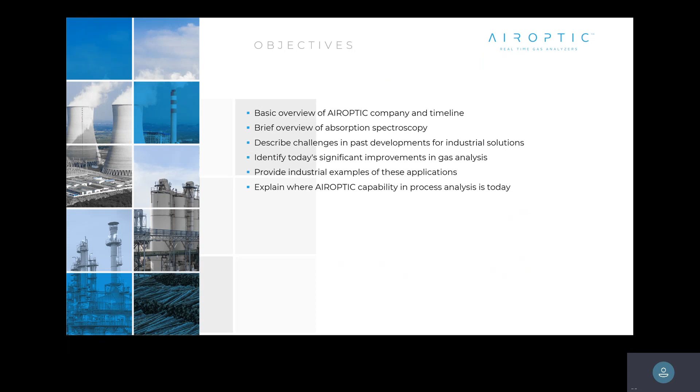So first, to give you a little background about Airoptic. Airoptic is a manufacturing facility, small medium enterprise company that's based in Poland, which was founded in 2010. They manufacture gas analytical equipment with an ISO 9001 certificate, and also have an in-house R&D department. Main applications are process control, power industry, pretty much all of the industries as a whole. With where we're at right now with near infrared and mid infrared, it's kind of difficult not to find a gas application that we can't do.

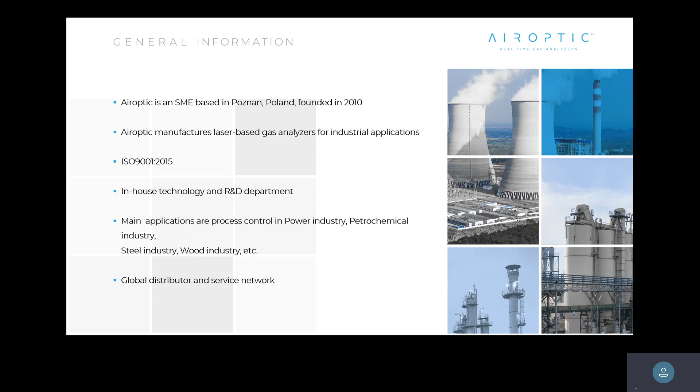And there also currently is a global distribution and service network set up around the world. So it's pretty important for us to understand a little bit about the history. I don't like to harp on it too much, but it's to kind of give you an understanding of where everything is coming from. So Dr.

Paweł Kluczyński initially was working for a company by the name of AltOptronic. This company was the first that came out with an ammonia in situ analyzer. He was also responsible for redesigning the algorithms and the optical bench for that analyzer, previous to Siemens acquiring that company in 1999. At that time, he was the chief physicist for about 10 years, and he was responsible for the LDS-6, which everyone is aware of now.

Going a little further, the SITRANS SL came out, which was their O2, SIL2 analyzer. Then in 2010, he created his own company, which was Airoptic. Now you'll see there's a little bit of a gap between 2010 and 2012, and the reason is that when he first created this company, he worked as a consultant, for companies that we know today like Emerson for their moisture applications, Mettler Toledo, and a few others. In 2015, we basically came out with the GasEye Cross Duct.

Significance of this analyzer is that we started getting into the mid-infrared for ICL lasers on single path analyzers. Then the multipass came out, which allows us to do multiple lasers into one. So we can do up to 6 lasers in one analyzer, giving us a lot of flexibility to meet customer needs.

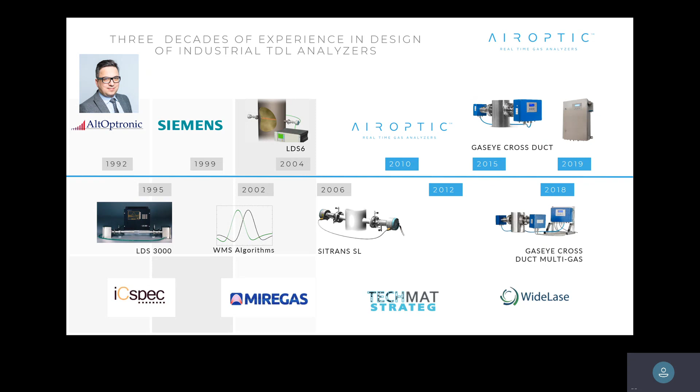What's even more significant is the WideLase project he sat on, working directly with the chip manufacturer and coming out with the first formaldehyde application. A lot of us have heard the papers today about open paths and formaldehyde. This was one of the applications he was directly responsible for.

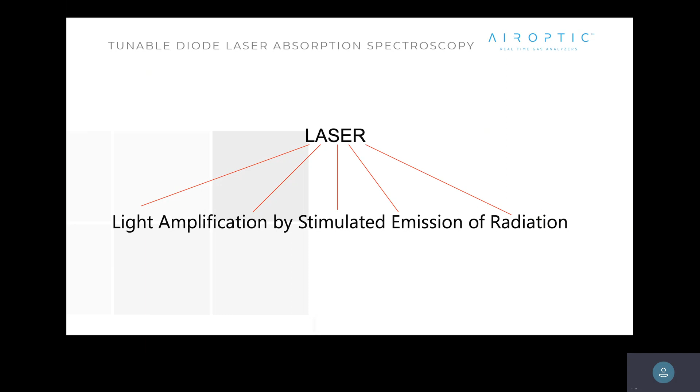So we use the acronym laser a lot. We really don't, you'd be surprised how many people don't know what the acronym stands for, right? It kind of speaks for itself: Light Amplification by Stimulated Emission of Radiation.

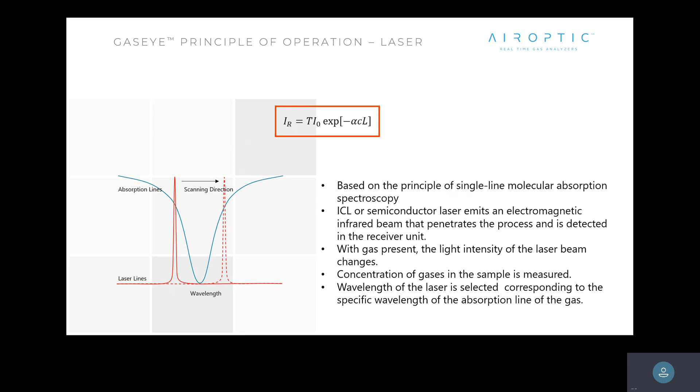Our technology works off of the Beer-Lambert law, absorption spectroscopy, where we're looking at the amount of electromagnetic radiation going through an open area. That open area will excite the molecule, which will absorb some of that energy. Then we look at the loss on the B side, at the very end. That loss of energy is proportional to the concentration between point A and point B.

So here we see our laser beam entering into the process, seeing the molecules or gas in the middle, and then we're also measuring the amount of loss on the end.

Every molecule has a certain amount of energy or atomic weight, based on the number of protons, neutrons, and electrons that we have. So what we're looking at is those vibrational bands that are absorbing in the near infrared and mid infrared region.

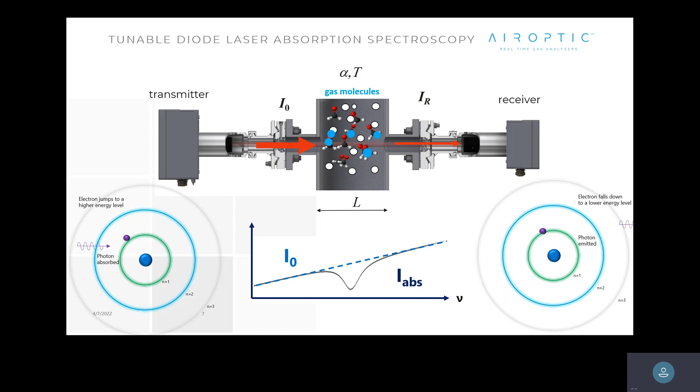As that electromagnetic radiation passes through the gas, you'll have some absorbance of that radiation, and you'll see the electron move from one shell to the next. So it's absorbing at that point. When it comes back down, it's moving to another transition. So that loss in radiation from point A to point B is what gives us the concentration in our analysis.

And then we're looking at the baseline, and again, that ratio of the baseline to the absorbance of the light is proportional to the concentration.

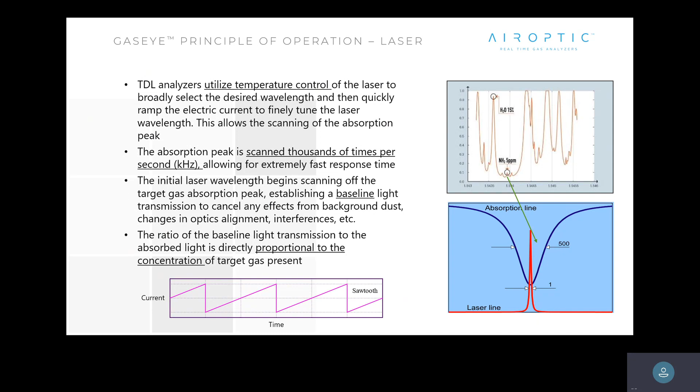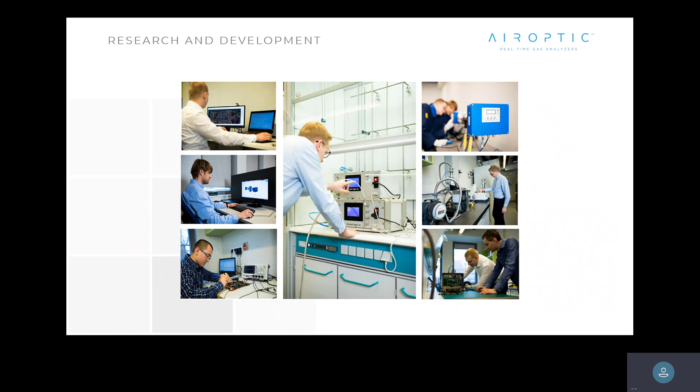This is a picture of their R&D, just to give you an idea of what it looks like back at the factory. A lot of scientists, a lot of R&D goes on to keep us up with being able to give a very highly accurate measurement, and helps with the development of what we need for the future.

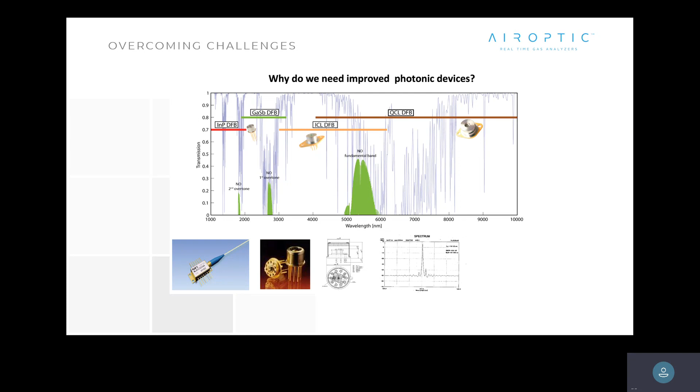So why is that significant? If we look at this chart here, we all know that in the past we've been pretty commonly in the near infrared region, and those were the spectrums we had available at the time. But now with the advancements with ICL and QCL, it gives us a pretty wide range of spectrum, a new spectrum that we can pick from to go into new applications.

If you see here, we're looking at anywhere between somewhere around 3,000 to 6,500, and we can see all of the different wavelengths that we're able to do within the mid-infrared. SO2, for instance, was something we never could do in the near infrared.

If we look at this next chart, we can see that in acetylene, in the near infrared, we had a very, very low absorbance. But now when we jump into the mid-infrared, we're talking about 30 times stronger worth of absorption spectra that we can pick from. So that gives us a better detection limit, better spectra, better absorption.

Same thing with NO and also with CO. You can see that line, the second line is our NO and our CO line. So we're basically just showing you what it looked like in the near infrared and now what we have available in the mid infrared.

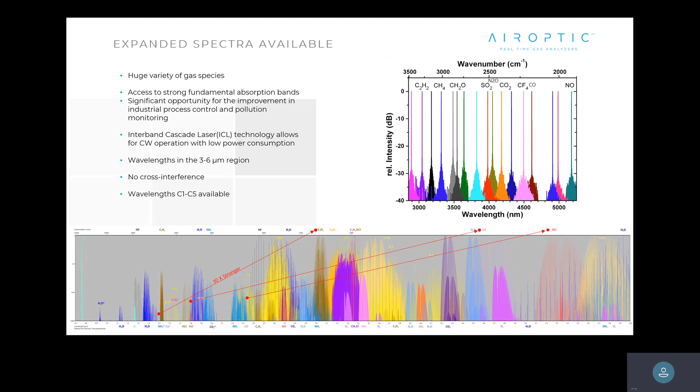So some of the advancements. So this is our GasEye, our cross duct analyzer. This is the analyzer that now has the ability to do near infrared and mid infrared within the same analyzer, with a lot of different gases here that we can pick from.

But for this analyzer, we have the capability of being able to incorporate up to 6 different lasers into one optical bench. So there's been a lot of advancements in our optomechanical bench. It allows us to make a lot of different measurements with a very low detection limit and also very, very low etalon noise issues.

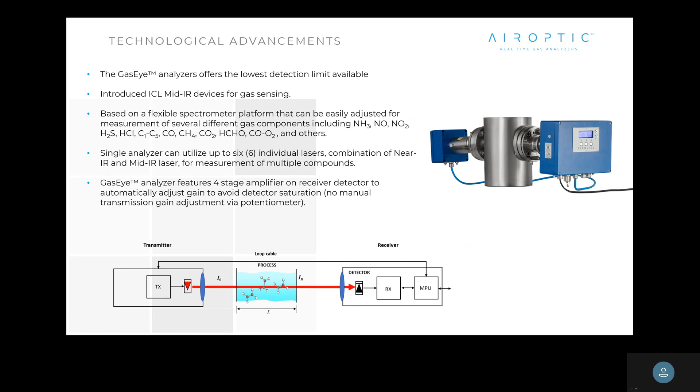And of course, this is our multi-gas. This is the analyzer that we're using to incorporate a lot of different mid-infrared and near-infrared lasers.

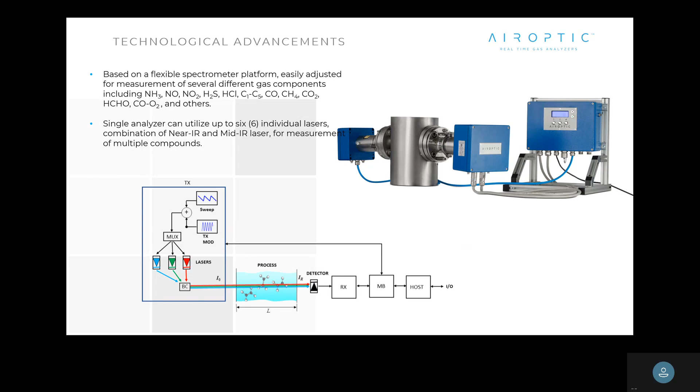There's basically 3 different categories that we really have. We've got the in situ analyzer, the extractive analyzer, and then we also have the open path analyzers. It's pretty common across the board.

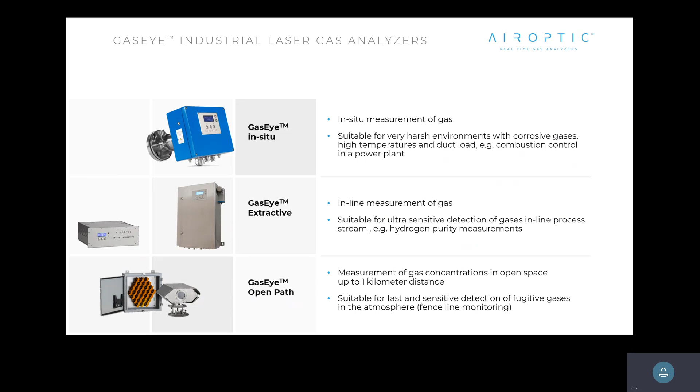And then these are our in situ flanges. What's unique about this is we have no soft goods in between the actual flanges and the nozzles, so there's nothing to worry about with leaking. What we find is very important is for the optics and pressure and the safety of the end users.

A lot of times we'll see optics where they're limited on the amount of pressure they can handle, maybe up to 5, 10, or maybe even 20 PSI. The issue is when you start getting into high pressure in situ applications, you have a safety issue with the actual optics. You may have polymers that build up on the nozzle, you may need to steam inject. There's a lot of different applications where you could put the optics at risk.

With ours, we actually have the ability to supply up to 580 pounds of pressure against those optics, so really no need for a full ported ball valve to be able to isolate the actual flange.

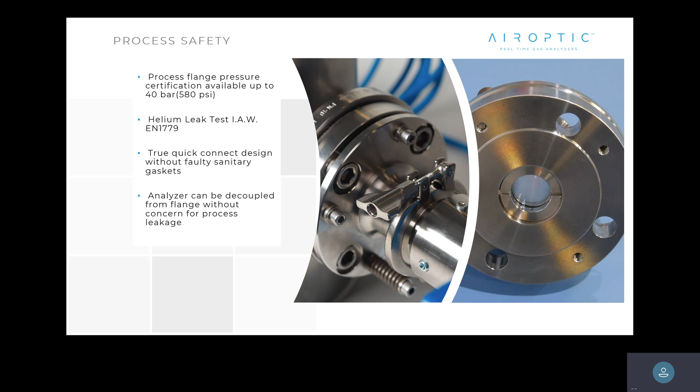The other unique thing is it's also a quick coupling. So if you ever needed to take the analyzer off and do maintenance or a calibration, whatever the issue may be, it actually has a quick coupling, so you're not actually taking the flange off from the process to take the analyzer off. It basically has a nozzle at the very end, slip it in, has an O-ring on it. It's a one-handed deal, so one person can install and remove the analyzer.

So if we get down to the open path, like we said, we've heard some of the papers. This was our AirOptic analyzer that we had in California with the ability to do formaldehyde down to less than 1 part per billion for detection.

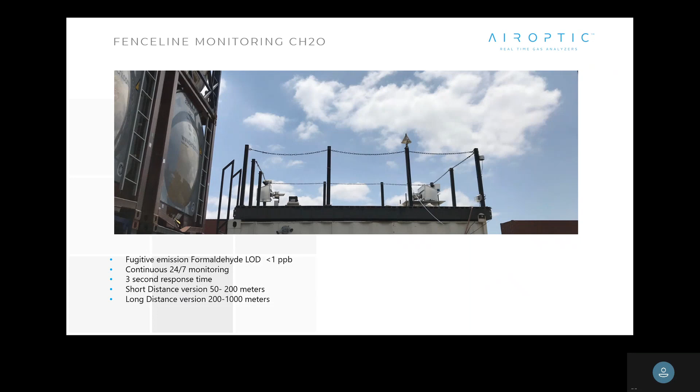And we also had the in situ formaldehyde as well. If you remember, we talked about the MIR program from Europe. This program was where we actually invented the formaldehyde laser as well and used it in this application, down to 4 ppm with a detection limit less than 5 ppb.

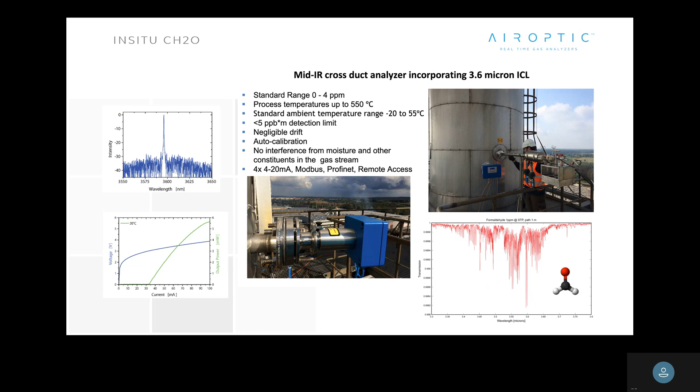Ammonia and moisture detection, pretty common for SCRs, power plants, and also for waste incinerators. In this application, the customer had 2 in situ TDL analyzers: one for the ammonia and also one for the HCl. The NO, the moisture, and also the SO2 was an extractive analyzer, which he pulled out, but had a lot of issues with the probes plugging up.

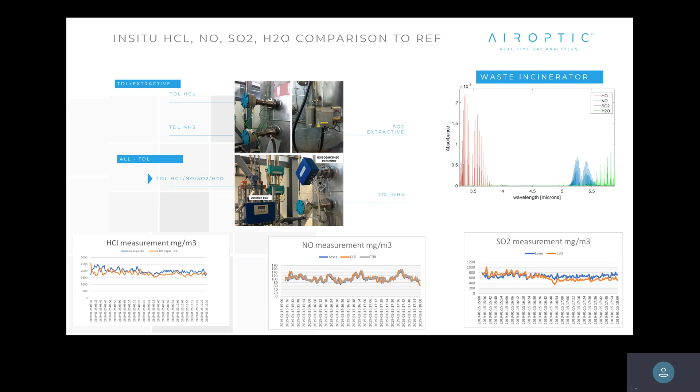So what we did is we removed one of the analyzers and incorporated all of the gases into one. Now what we have is an HCl, NO, SO2, and moisture analyzer all in one path length, one nozzle configuration, with the ammonia as the secondary.

If we look at some of those detection limits for the SO2, we had 5 ppm - sorry, we had 0.08 and 1 relative to SO2, HCl, and NO. Again, we've got that whole mid-infrared region that we can pick spectra from to give us those analyses where we couldn't get before with near infrared.

ppm meter, yes. Your ppm meter will obviously change based on the path length that you'll have, right?

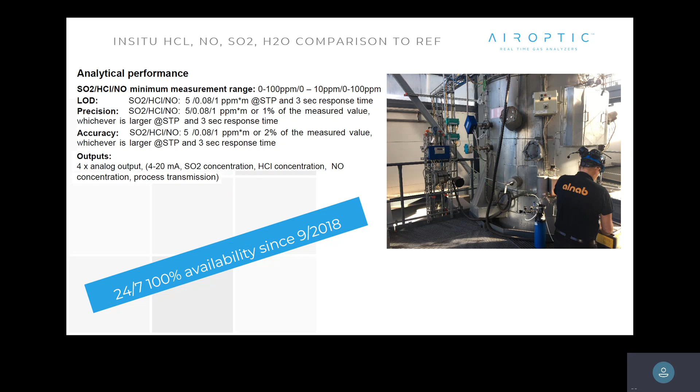This is in situ NOx, where we were measuring NO, NO2, and moisture. We all know in our past, previous to mid-infrared, NO and NO2 was very difficult in the near infrared, just didn't have the right spectrum to pick from.

So a lot of times you would use a converter to get your NOx, or if the customer was okay with it, you would give them a differential to achieve the NOx as well. In this one, I think we were 0.1 ppm per meter and 1 ppm per meter for NO and NO2.

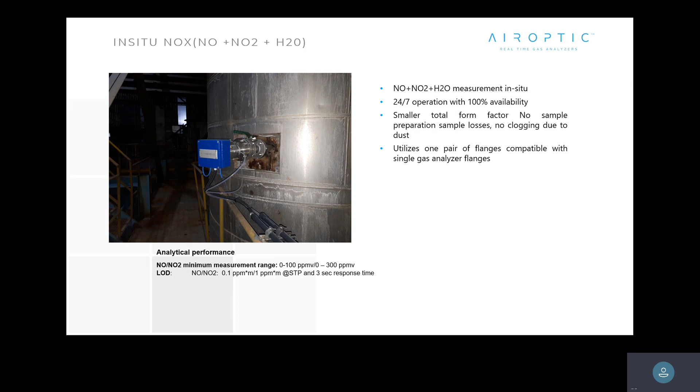And then DeNOx - now we're looking at NOx, ammonia, and moisture all in one application. Or we can look at the NO, NO2, and moisture, and also the ammonia and moisture, which is pretty common in near infrared as well.

But I think the significant thing is if we look at these applications I'm showing you, in some kind of way, shape, form, or fashion, we have some mid-infrared incorporated into the laser. And you can see that the detection lines are pretty significant for us for measurement, and the detection limits are incredible as well.

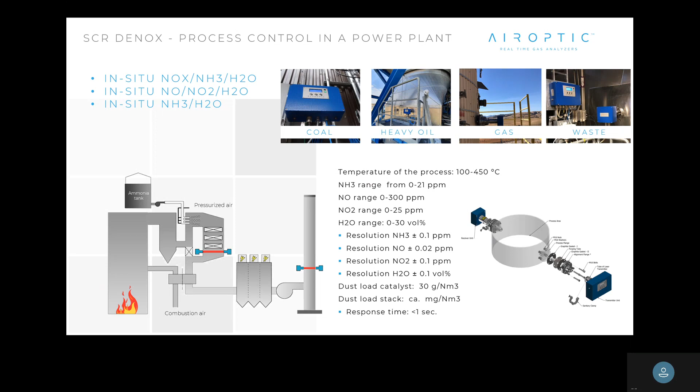And here's your DeSOx. So again, you're looking at SO2, HCl, and moisture. The SO2, HCl, moisture, and CO. There's just a numerous amount of combinations that we can go with.

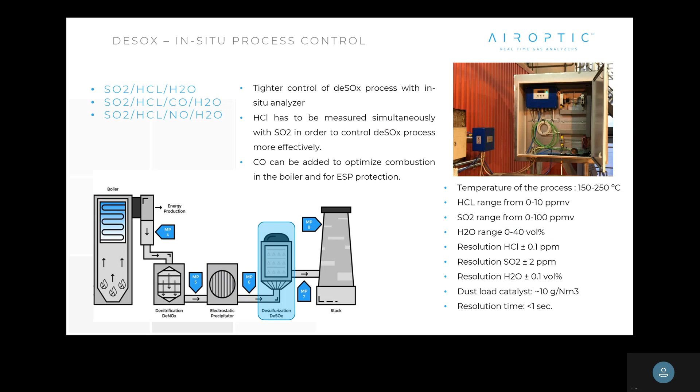Our next one, combustion: O2, CO, methane, moisture, and your temperature line as well. So if you're trying to figure out where your stoichiometric formula is, how much excess O2 you have, where your methane is at, and where your CO is, you can get that all in one measurement. With the AirOptic analyzer, we have no moving parts.

We're actually shooting the beam across the actual furnace in the convection section, measuring it on the B side as well. By shooting all the way across the furnace, we don't have any saturation issues. Sometimes if your path length is so long and you're using a 2-pass system or a reflector on the other side, you're doubling the path length. The problem is you can hit a limitation with saturation and can't achieve the actual ranges you're looking for. So we just go one single path across the entire furnace.

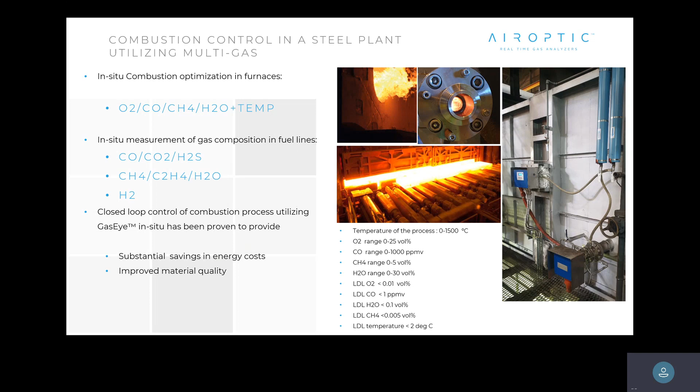And then our sub-ppm unit. This is one of our extractive units here in the rack. This was here for the H2S, and it got us down to 0.2 ppm. Our extractive analyzer will basically have a Herriott cell inside, where the laser beam comes inside between 2 reflective ends, whether it's highly polished metal or gold-plated mirrors of some sort. Every time it bounces back and forth between the mirrors, we increase that distance or path length, and that absorbance will actually get us down to a lower detection limit also.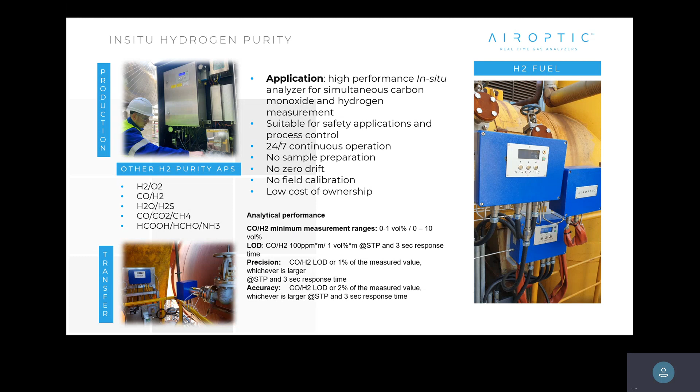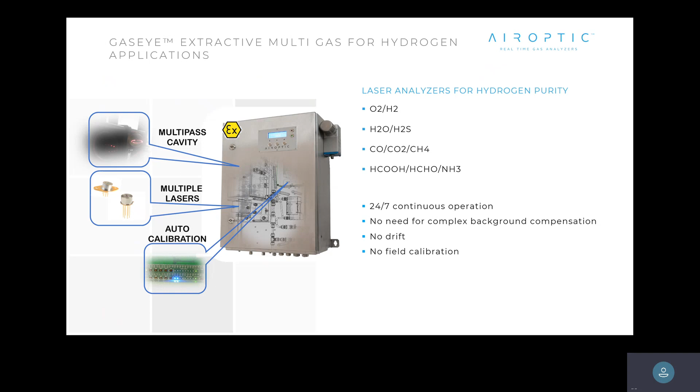And on our extractive unit, this is where we're actually pulling the sample, going through a Herriott cell, and achieving a detection limit there. So we've got combinations of O2 and hydrogen, moisture and H2S, a lot of desulfurization units. We're pulling the sample out for H2S, and CO, CO2, methane, and formaldehyde all the way up to ammonia. And you see here for our trace moisture and hydrogen, or H2S, we're able to get down to 0.05 ppm for moisture and 0.2 ppm for H2S. Currently that's the lowest detection limit that anyone can achieve in H2S today that we know of.

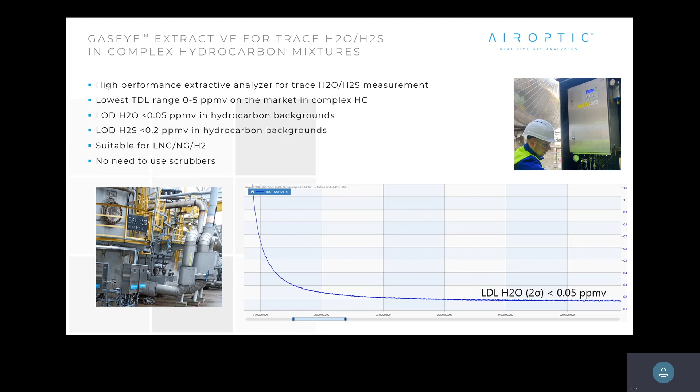So what are some of the advantages? Obviously the mid-infrared gives us an entire different range of spectra to pick from that we never had before. It's pretty reliable, low power consumption as well. It's very flexible for us to use near infrared and mid infrared lasers all in the same platform. You can do cross stack measurements. We've got some of the lowest detection limits you can achieve, 1 second response time, no interferences with the gases.

Obviously, we're looking at the molar composition for any specific process. We're going to run that across a HITRAN, figure out what spectra don't have interferences in their backgrounds, and that's how we achieve the wave number or wavelengths we want to measure. Highly sensitive, we can get all the way down to ppb, and in some gases down to ppt. Very specific to that spectrum because we're actually tuning the laser to continuous wave for absorption based on the spectrum we're looking for.

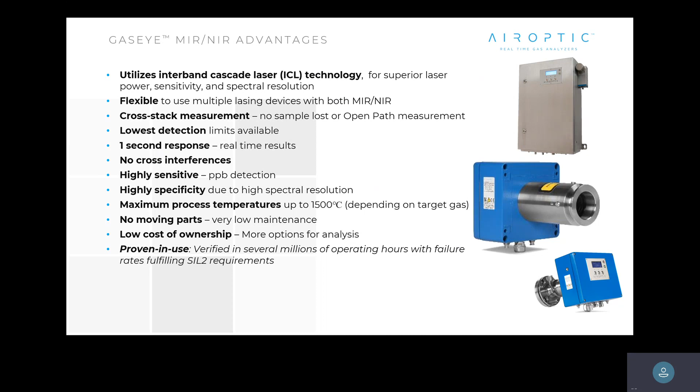Process temperatures all the way up to 1500 degrees Celsius. No moving parts, low cost of ownership. I think it's even more of a low cost of ownership today with us being able to combine the near infrared and mid infrared together, because now the customer themselves can actually customize that laser to the application they have. And proven in use with over millions of operating hours, with safety failure fraction numbers that meet SIL 2 requirements.

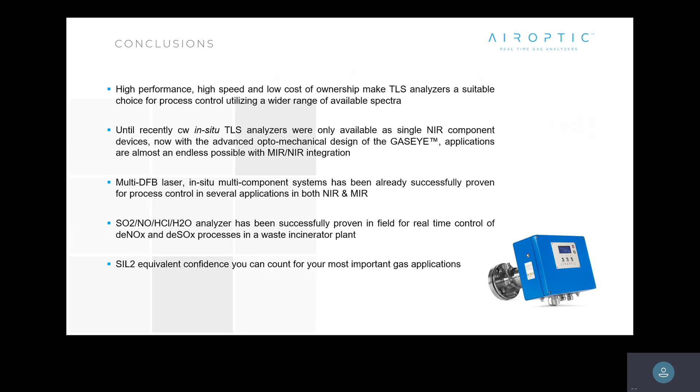Pretty much some of the same conclusions. So now we have the ability to do that near infrared and mid infrared - very high speed, low cost ownership, high performance. Again, until now we were only able to do near infrared for in situ. But now we're looking at mid infrared and near infrared and in situ, with a lot of different gases to pick from, including SO2 and the ability to measure NOx, with safety failure fractions equivalent to SIL 2. And that's it.